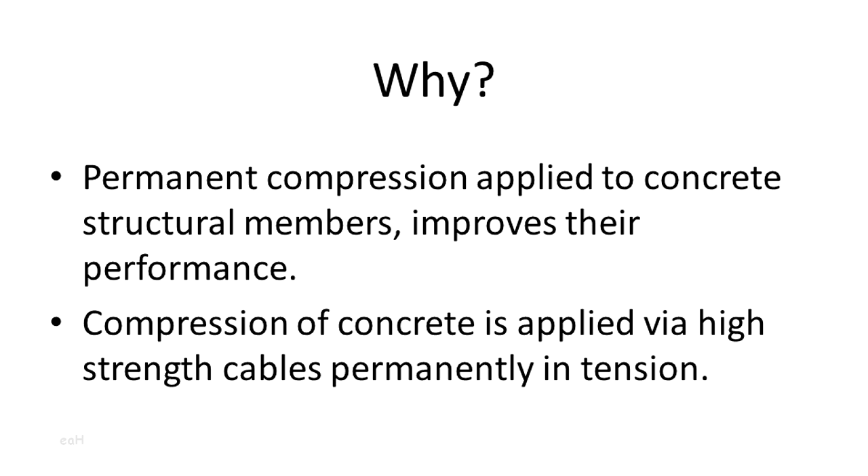Basically, what it allows the concrete to do is perform more efficiently. Concrete's weak in tension and strong in compression, so the purpose of these cables within your slab is to keep the concrete theoretically permanently in compression. So when you load it in a beam, instead of creating tension, you relieve the compression that's already in there. It allows concrete to be longer spans and thinner members and generally nicer. So that's how that works.

This effect is accomplished in various ways. You can have prestressed members, which are typically precast. These kinds of things are made in a yard somewhere, and the way those are put together is you have a cable that's stressed, and then you pour concrete into the form, and then when the concrete gets strong enough, you release the cable, and it's bonded the whole length.

I'm not going to talk about this kind of thing because the repairs are relatively simpler.

Post-tension members are kind of the opposite. You put the concrete first with ducts and cables in there. Then when the concrete gets strong enough, you can stress the cables, which transfers the compression to the concrete. These fall into two categories, bonded or unbonded. I'm going to be talking about unbonded systems because they're way more common and also harder to repair, I guess.

Could you define bonded? Sure.

Bonded basically refers to the concrete in general being adhered to the steel. So in that kind of system, if you have a cable that rusts through or something, the effect's pretty local. You lose your cable where it's rusting, and then the bond to the concrete makes it effective away from that area. In unbonded systems, you'll have this tendon running multiple spans in your structure, and it's not attached to the concrete. So if it breaks anywhere along its length, you lose the effect for the whole span. So it's a little more of a significant thing when those types break.

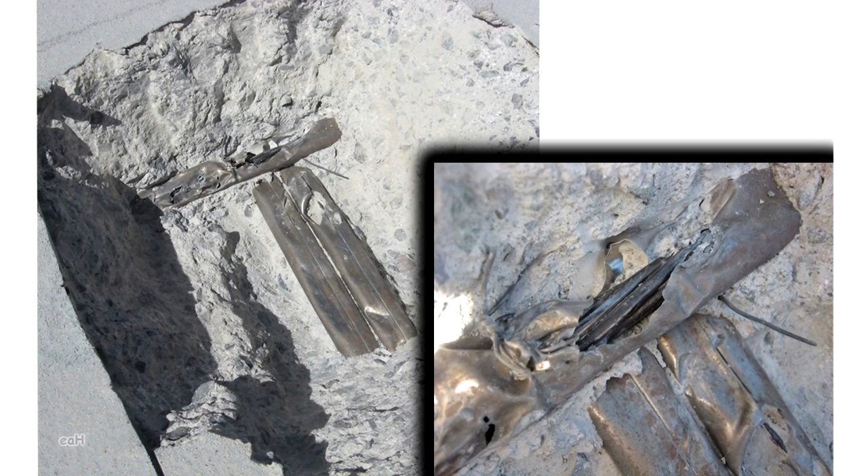So this is a picture of what a bonded post-tension system looks like. They have these metal ducts in your slab. What this picture is, is a parking deck. You're looking at the top surface of the deck where they dug out some of these. And then if you breach the metal duct, there's a cable inside, and the space between the cable and the duct is grouted with the cementitious stuff.

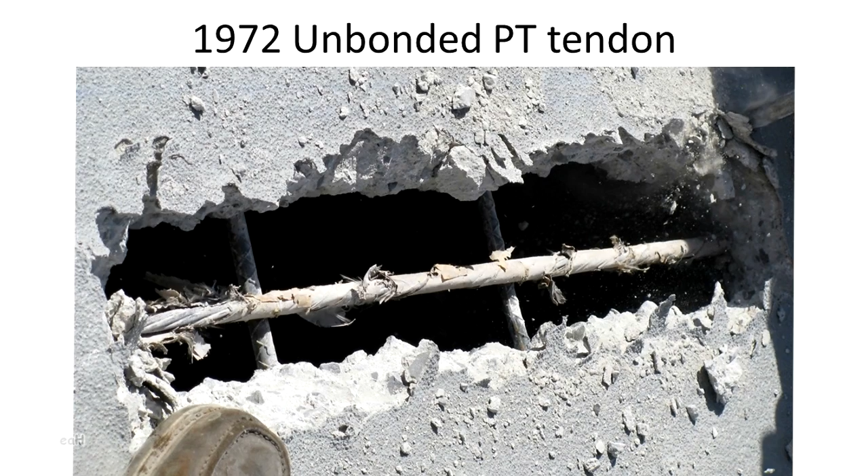Unbonded systems, basically it's a sheath with something to prevent the bond, like a grease or something like that, and then your metal cable goes inside that. This particular one is from 1972, and you can see it's got this ratty paper stuff on it, and you can't really tell if there was grease or not to begin with. I have an example of that here. This is kind of how it was done in the earlier days.

And kind of an intermediate system, I only have a little piece of it, but is this gray sheath. If you look at it closely, there's a lap in it. So it's formed by a plastic sheet that's lapped over and welded on itself. So that's kind of halfway between the old and the new. But once in a while we'll see those too.

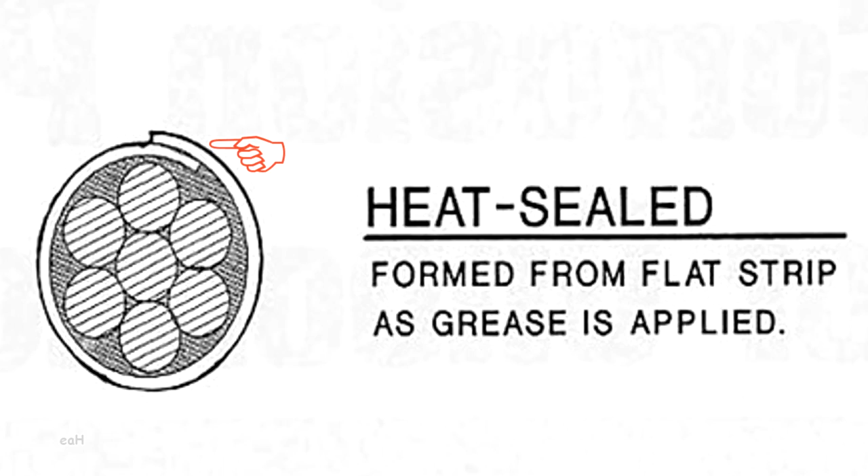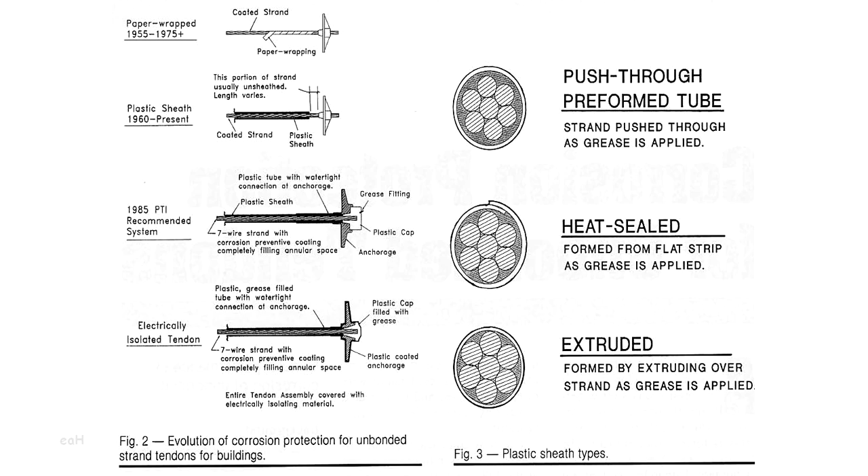And it's important because the strength of these cables is a lot stronger than your conventional steel. And if you lose a little bit of it, it's more significant compared to if you lose a little piece of your rebar. So this is the paper one, and then they went to plastic sheaths with gaps between the anchorages, which would corrode. And then in 1985, the Post-Tensioning Institute recommended this system, which is completely electrically sealed, which is what's preferred today.

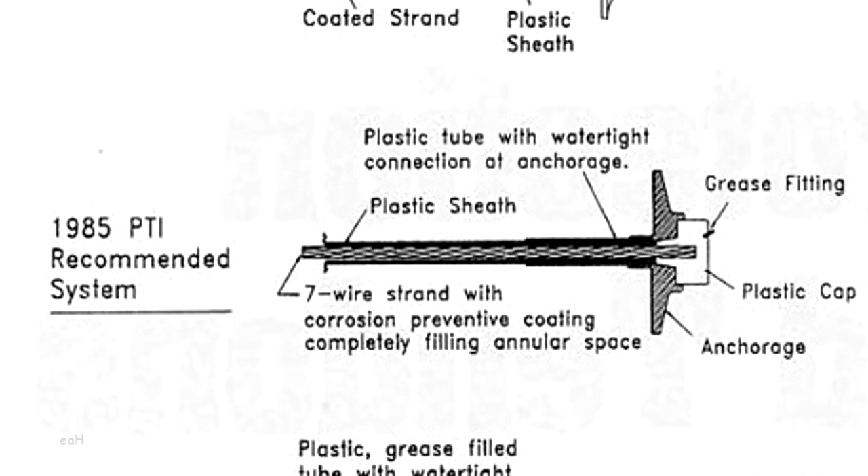And yeah, the electrically isolated basically means all the metal that's structural in there has no electrical connection to anything else. So the whole system is insulated.

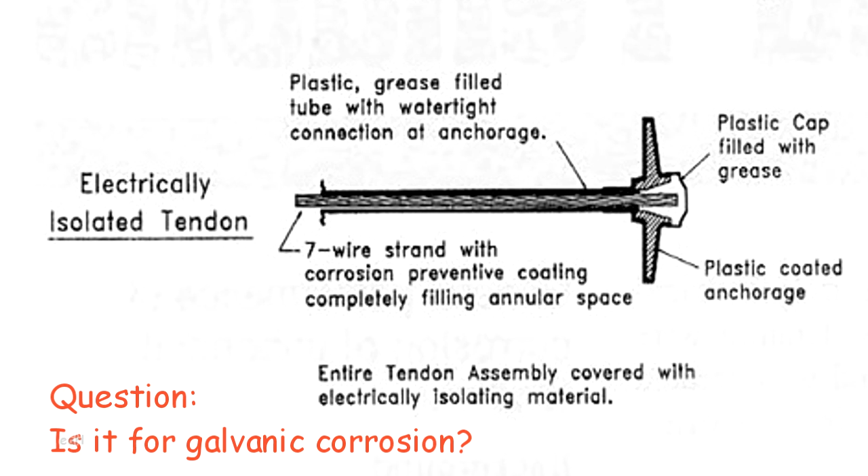Not necessarily galvanic, but just corrosion in general. A lot of the time, what happens is this zone is problematic because you put these cables in before they're stressed, and you have these anchorages with some sheathing. When you pull the cable, it stretches like 6 or 10 inches, so you need space for movement there. The electrically isolated system protects that area too.

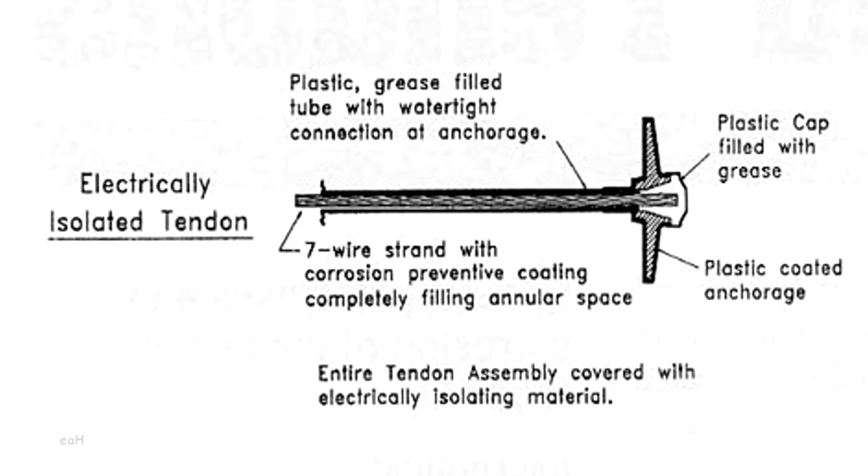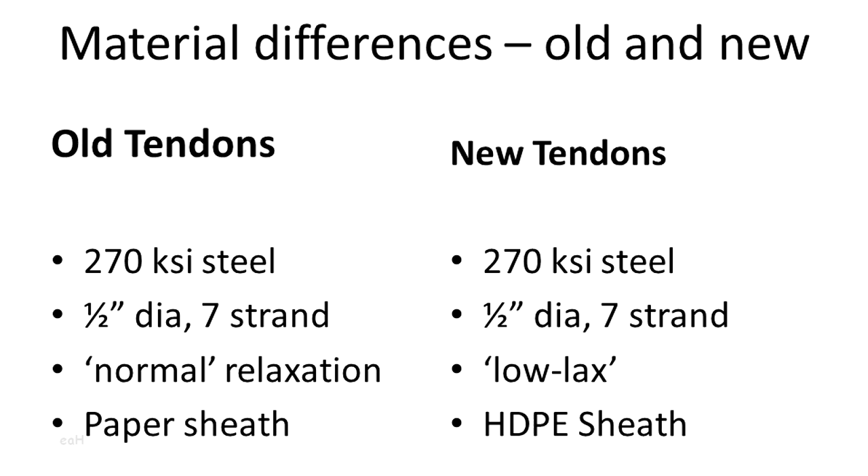The material in the cable, back in the 70s, has the same ultimate strength, 270, as the new one, and the same size and dimensions. The old ones are called normal relaxation, and the new ones are low relaxation. Relaxation refers to the metal stretching under sustained stress, so after a few years the state of stress in your metal will be less. The old sheathing is paper and the new ones are polyethylene. To give some numbers to the relaxation concept: the normal ones at 80% of ultimate stress will lose about 12% of their stress, while the newer ones lose about 4.5%. So it's a material improvement that's been made since then.

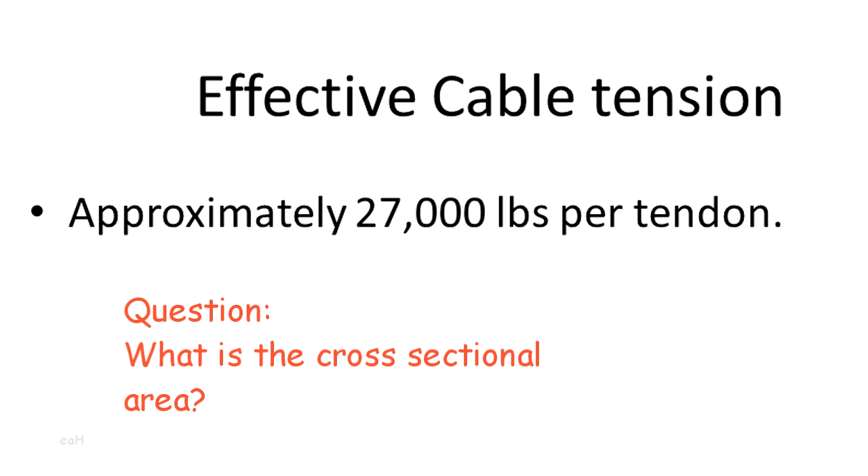The effective tension on one of these things is about 27,000 pounds, which is why when somebody drills through it, it makes a nice pop, and when they break they can blow out the inside of your building or through slabs. The cross-sectional area for 27,000 pounds - these are half-inch diameter, but not a perfect circle since there are 7 little wires, so it's about a third of an inch in that metal. That's about 70 to 80,000 psi.

So the basic problem with these things is corrosion. Highly stressed metal is more sensitive. Detailing in the old systems doesn't really take into account corrosion enough, and sometimes you get placement issues with the tendon going too close to the surface and being exposed too much. Then there's the man-made damage.

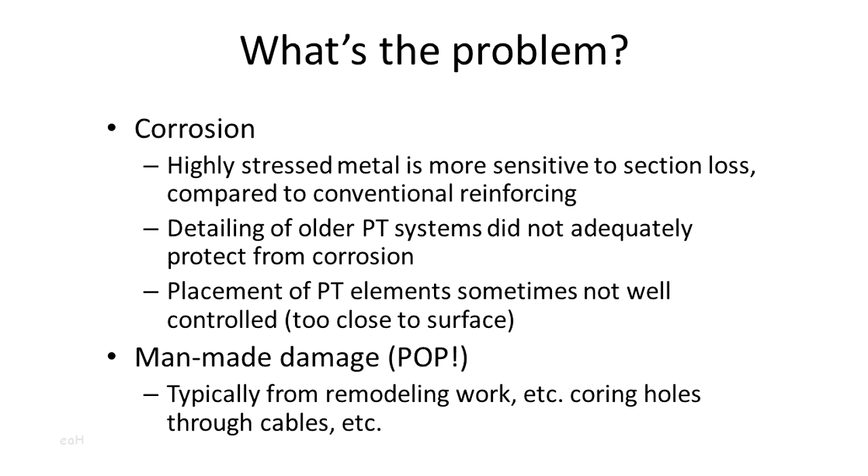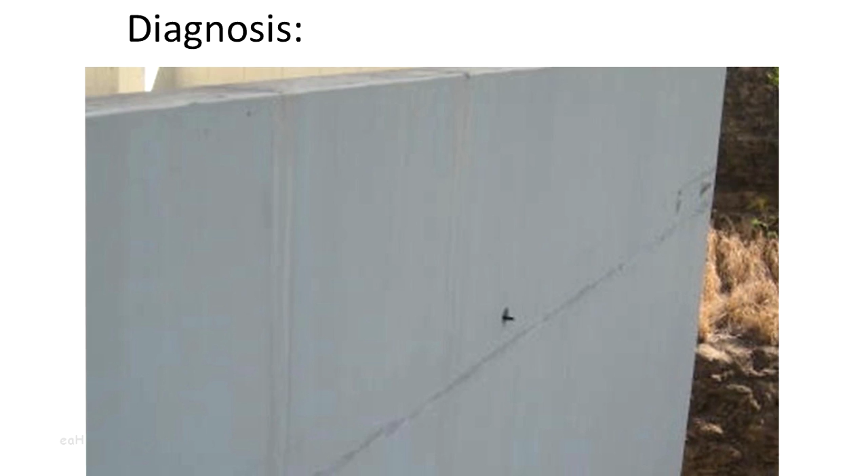I'm going to talk a little about what you'll see when there's a problem with one of these things. This one is the side of a building, where there's a little pocket with a stub sticking out. This one's only a couple inches, but these things can jump out a few feet in certain cases, depending on how long the cable is and how straight it is. It's basically recoil - if you cut the thing, there's all this energy stored in it, like a rubber band, and it tries to pop backwards.

So this was a broken one. I think these two ended up also having issues. This building is in Aiea - I think it's Century West, a residential building. These were about, I'm thinking, between 2 and 3 feet apart in spacing.

There were cables that aren't shown there. As I'd mention before the meeting, these systems are pretty redundant, so if one breaks, you've got one here and one there. It's not like your building is in grave danger. If you catch these through maintenance and fix the problems causing the corrosion, it's generally not a big problem as far as collapses and things like that go.

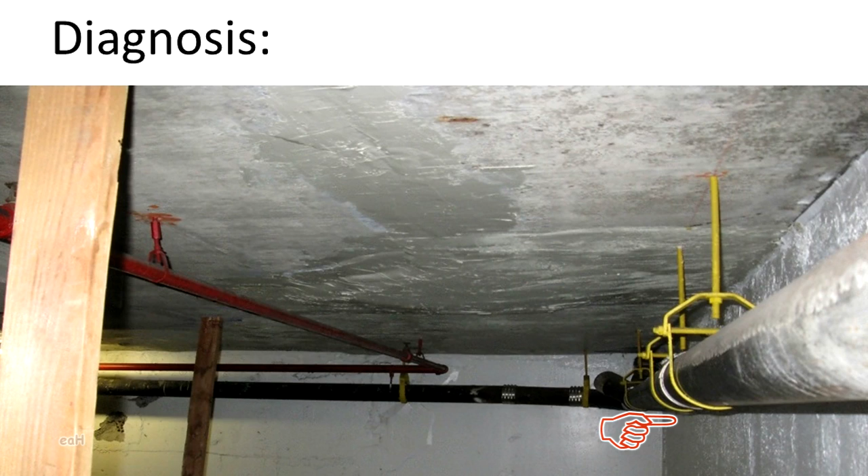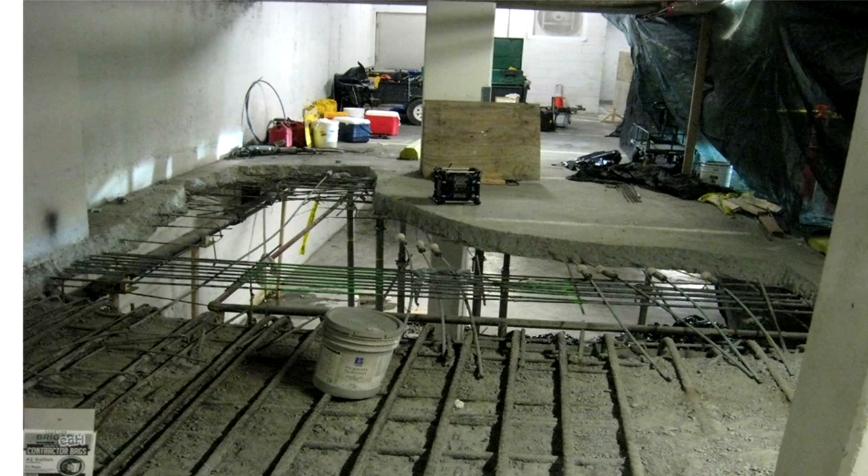This one is a parking garage in Waikiki. This is a PT slab, and there's this bulge in the bottom which was slathered with epoxy by their maintenance. We found the cause of this was this wall - it's below the water table, so you get seawater seeping in, which caused lots of corrosion. This is the top side of that slab after we took out everything needed for the repairs, and they had a bunch of broken ones here - you can see 3 there, 4 there, and a couple more broken ones going this way. So a little thing like that, which doesn't look totally alarming, can turn into something bigger if you have a big driver of corrosion in the area.

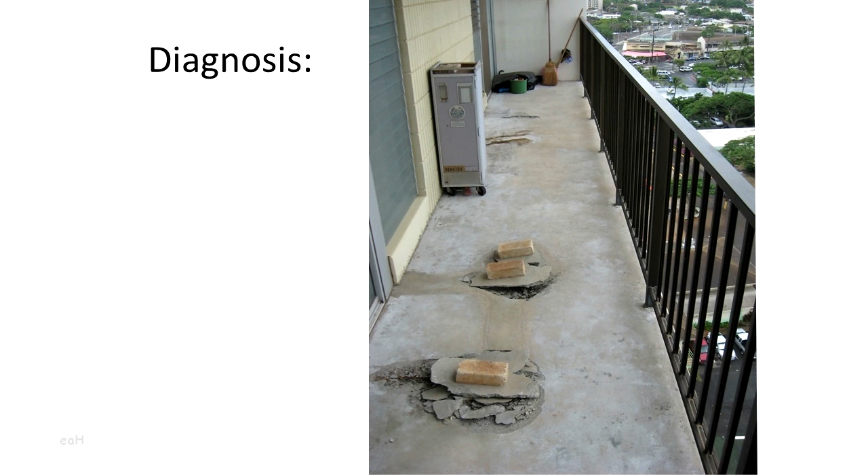This is a lanai near University. These pieces popped up and they called us to figure out what's going on. The building had paper-wrapped tendons, and right here is the high point because the lanais are cantilevering over the edge, so you want your reinforcement as high as possible. They were covered by only about half an inch to zero inches of concrete, and you can see it's just bare concrete - they didn't have any protection at all.

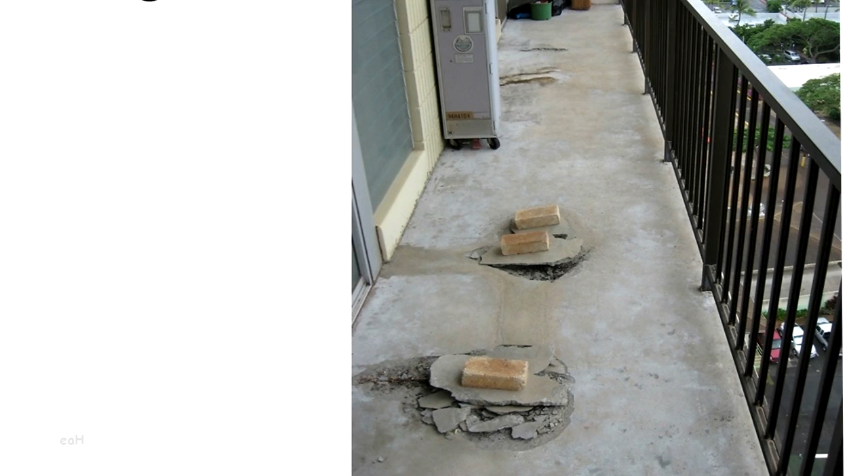Why do they pop up like that? When you release the tension, the thing recoils back. So if you're at a deviation in profile, or what also can pop these up is simple rust expanding. It's like a kick of a rifle butt.

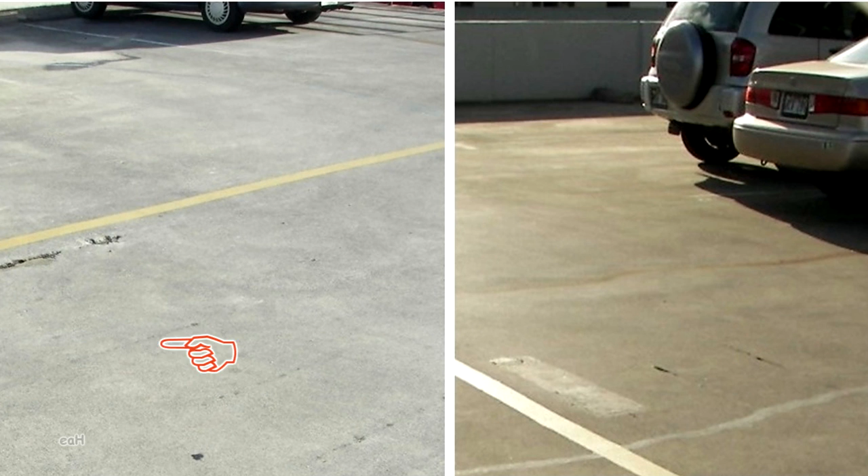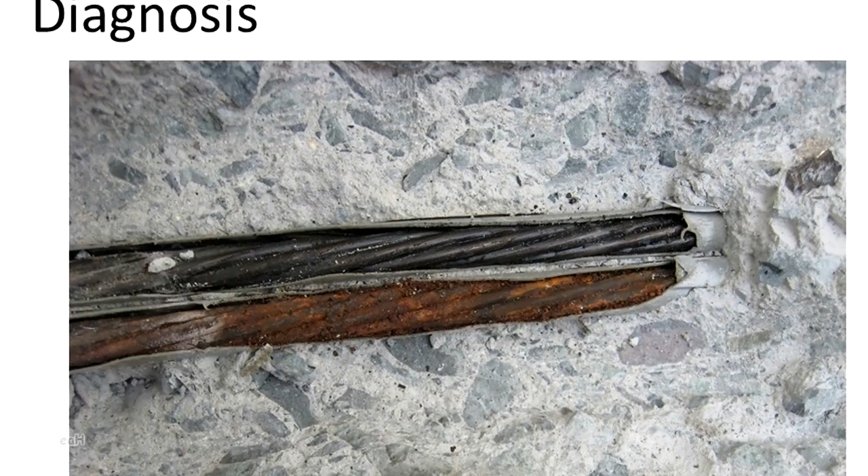Yeah, basically. So sometimes you'll see little spalls on your decks like this, and that can mean post-tensioning issues. This is an opening in a slab we did, and we cut off the sheathing to see what the cable looks like. This one's bright and shiny, and this one's got some rust on it. The contrast doesn't let you see that too much. Basically what happens is once water gets into these plastic sheaths, they're captured there, and they'll find the low points and puddle, causing problems. But if you have it sealed off, it stays good.

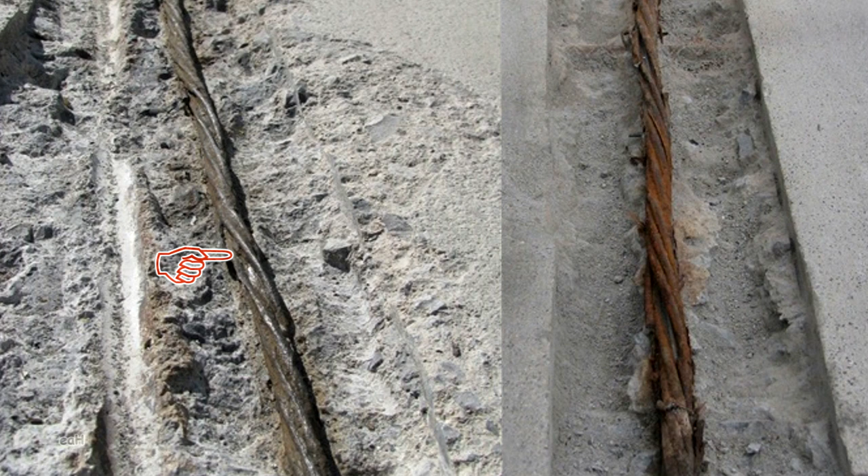So I'm going to go through a couple that are good candidates for repair. This one you can see has a wire kind of missing, so it's at least partially lost its stress. This one's kind of the same deal. Sometimes when you take them up, there's no attachment at all. This one has some emulsified grease in it. The old greases they used weren't durable—they'd get dry and crumbly after a while.

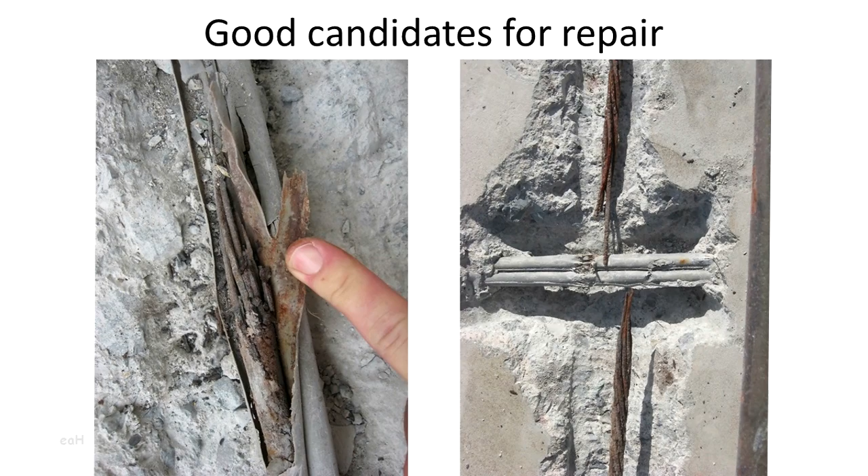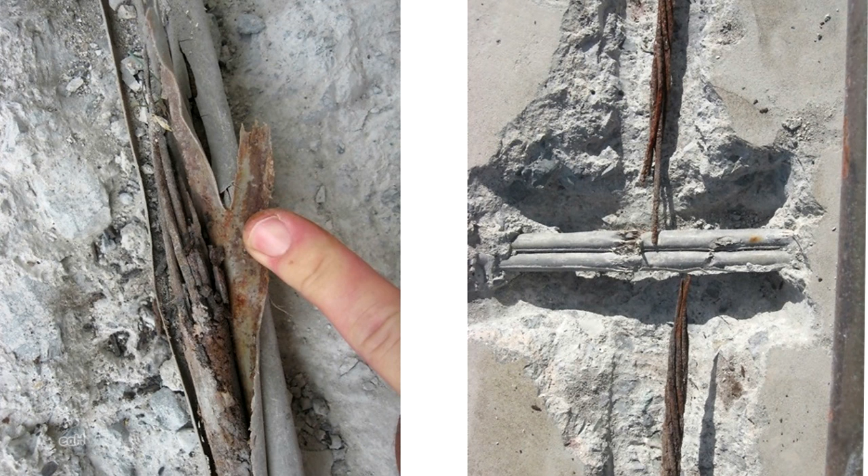As you go along, could you mention if you were redesigning this today, what would you do to prevent this? Sure. For one, this one was fairly close to the surface, so you'd want to have it covered a little more. This system is that intermediate system with the lap sheath. The new systems have a continuous plastic tube, so there's no path for water to get in. And the newer greases are improved also.

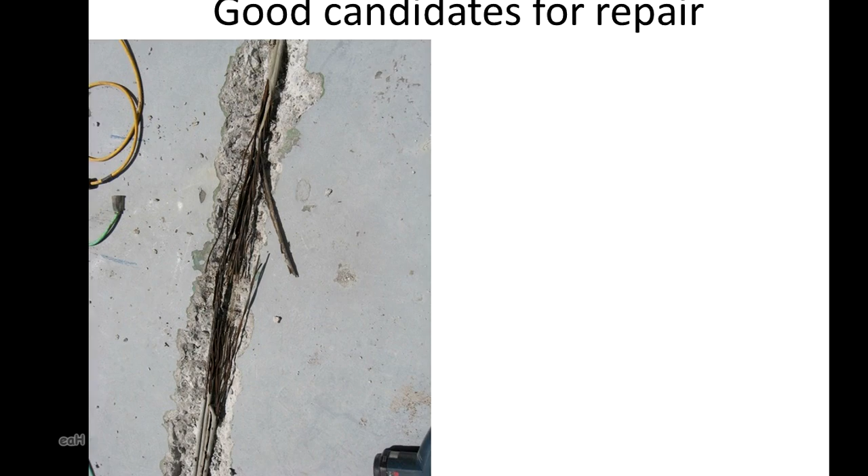This one, sometimes they get big and basketing out, because once you start losing them, the wires get frayed. Did the concrete just explode on its own, or was that dug out? It was almost there—you had little chunks on top.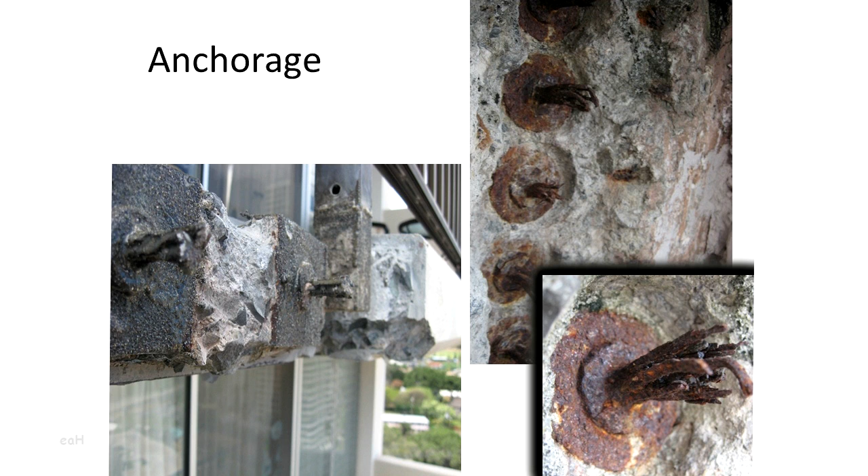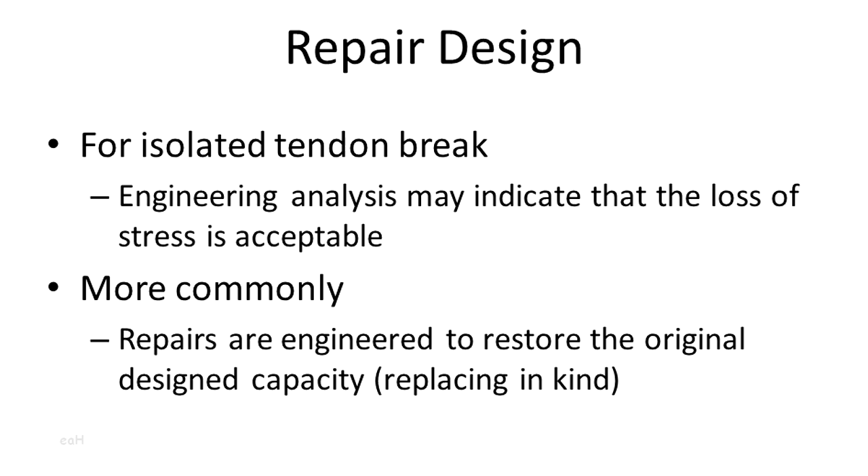For an isolated break, you may be able to accept the loss of a tendon. More commonly, you just restore what the original designer put in, because the cost of engineering fees approaches the cost of actually doing the repairs, so you might as well just fix it. The procedure: you remove the cables, demolish the area near the break to make a splice, insert a new cable, assemble splices with new sheathing, apply tension, install sleeves around your splices, and patch it up with new concrete. You also want to coat the outside of the concrete to prevent water coming in.

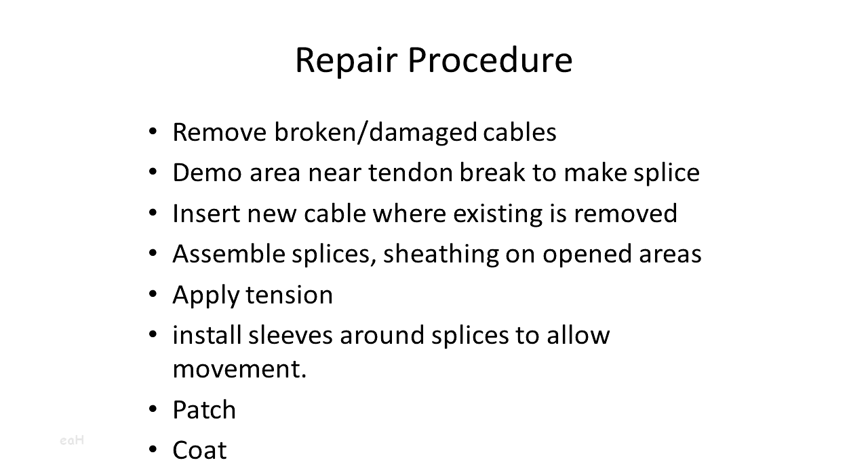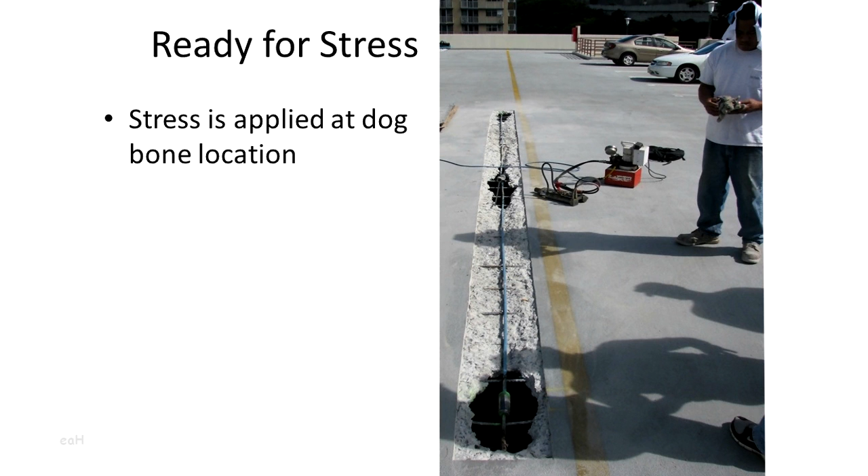What do you splice? I'll show you in a second. The splice is basically a barrel-shaped thing, kind of like the Chinese finger trap. There are wedges that grab the cable and prevent it from pulling out.

This little component is called a dog bone because it's sort of shaped like that. You have a cable that comes in this way, and it's anchored there. Then your cable coming from the other direction comes in this way, and it's also anchored here, but it allows you to jack against it. Because sometimes the ends of the cables are obstructed from facades or whatever, a lot of times it's easier to do this somewhere in the deck.

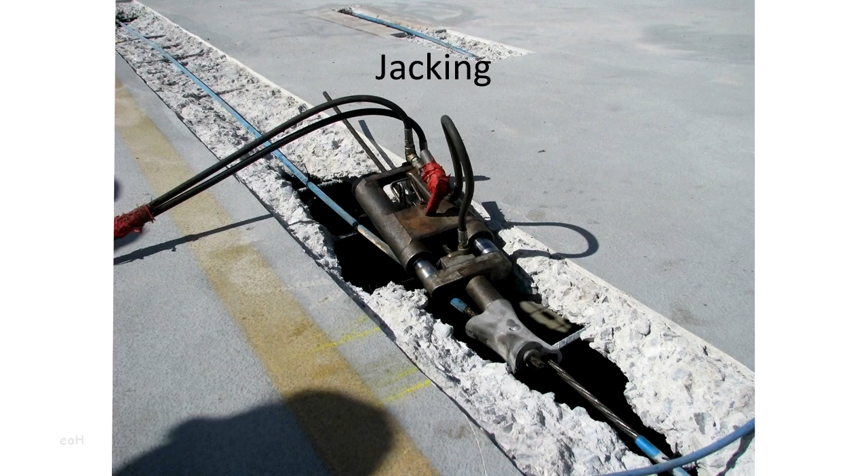So I'm going to show you some videos of what this looks like. The first thing they do is they set all the wedges, and then they apply a stress to it without finally locking it off. That's just to set all the components and make sure everything doesn't move unexpectedly.

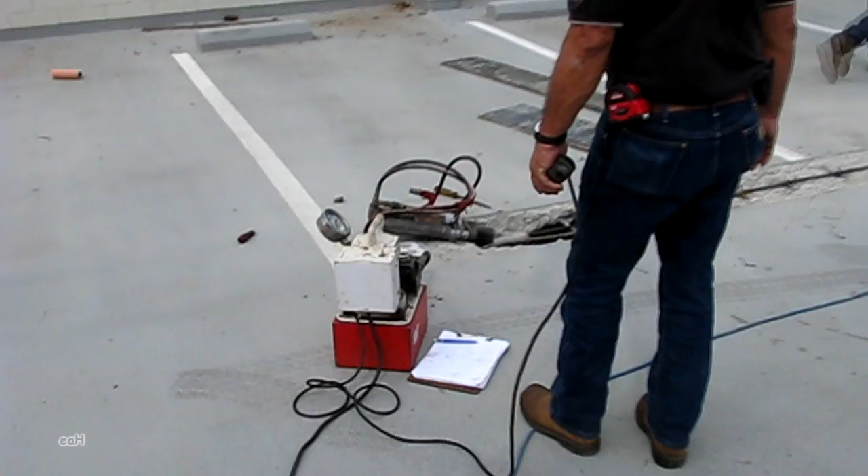This device here is a hydraulic jack. You've got a pump here with a gauge that measures your pressure. This little guy has a wedge that grabs the cable here, and it's pushing against that dog bone piece there. So in doing that, it pulls the cable through.

It's important to watch how much stress you're putting on it, because if you stress it too much, you'll break it, and if you don't stress it enough, you're not getting your effect. So that's what it looks like just to set it. And he's going to take that guy off.

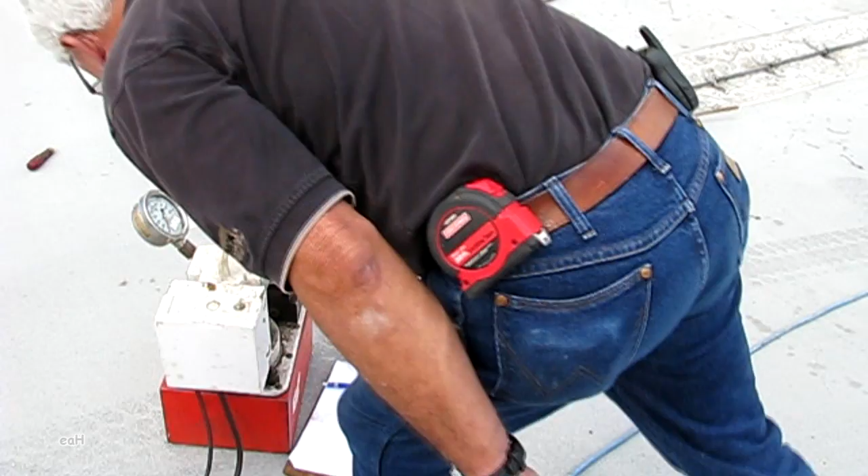The next step... You ever pop one of those cables when you put some tension on? Yeah, it happens. What happens in that case is you pull it, and a lot of the cable's still embedded, so it may have issues down the line somewhere.

So he'll do that, and it'll just keep pulling out. And if there's an issue somewhere down the line, what they do is they take the cable and pull it out of the hole and measure how long it is, and then they go dig where the issue is and splice it again. This can happen a few times.

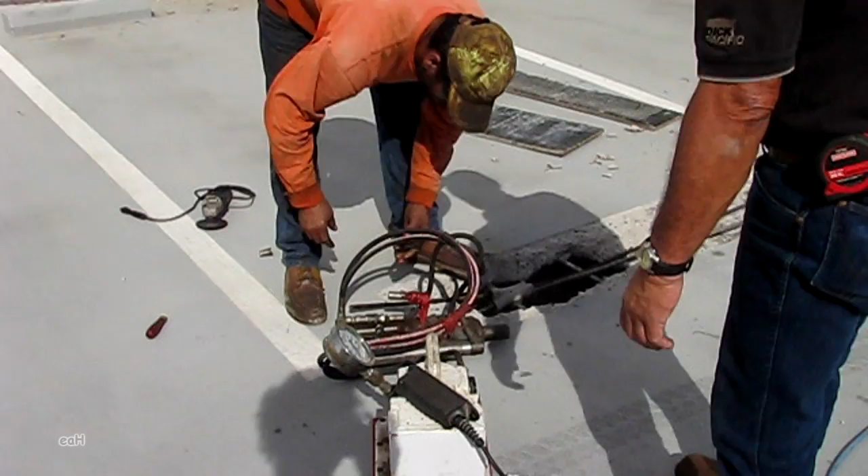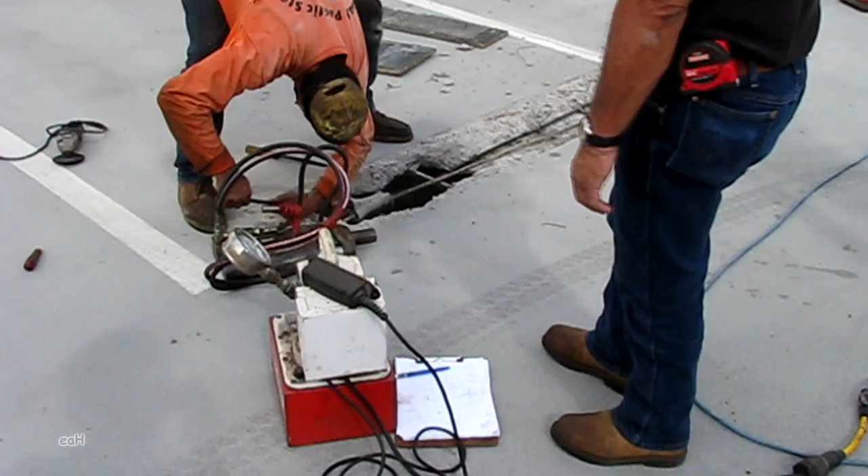So the next thing they do is install wedges on the cable. The wedges are little hardened steel things like this, you can pass them around. They've got teeth on the inside of them to grab the cable as it pulls in. So he's just sliding it on there, and the wedges seat inside of a little hole inside the dog bone piece there.

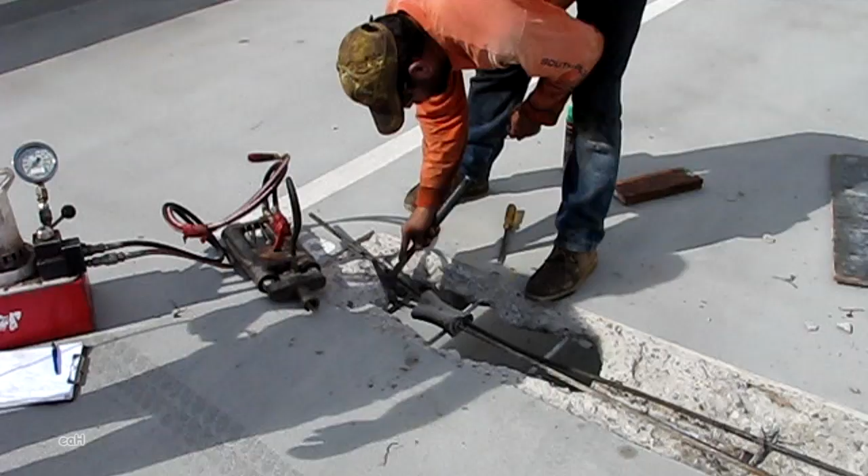Then the next thing to do is set up your hydraulic ram to the final test. He's making sure he's got a connection there to the cable. Just 2,000 gauge reading, I forget whatever that is there, but that's just to seat the couplers, the wedges.

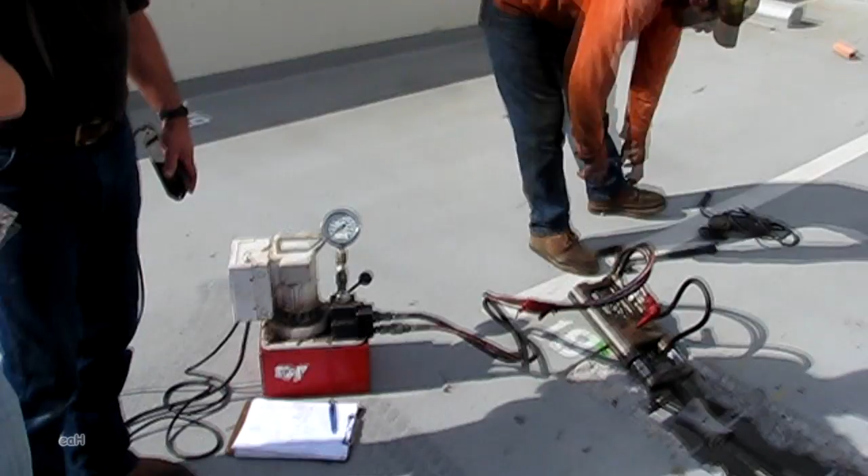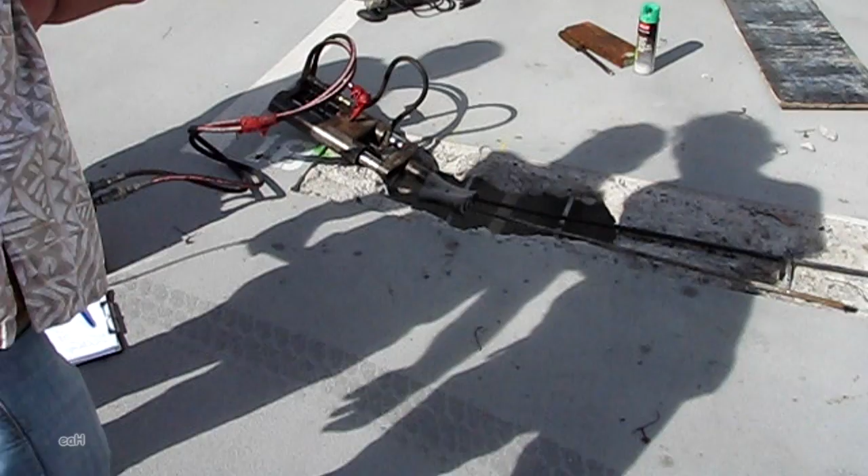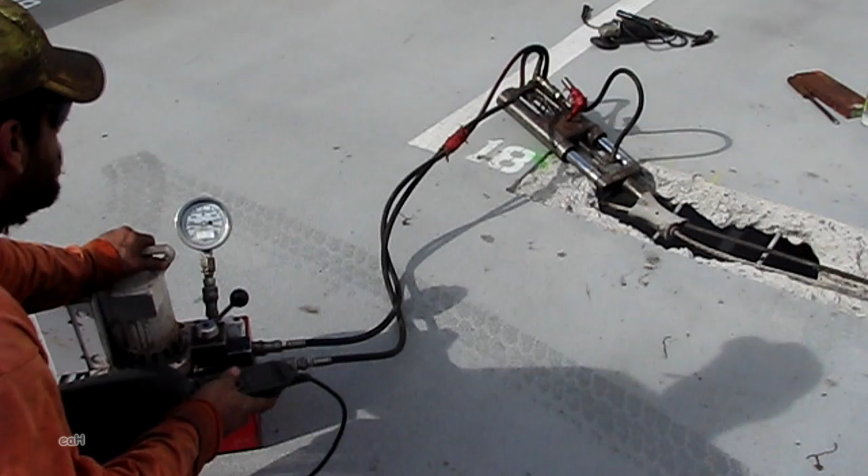For this particular cable, it was kind of a long run, so what he has to do is jack only goes a certain distance. So he pulls it and then resets it and then pulls it again to get the final amount there. Just resetting the lock on the jack side.

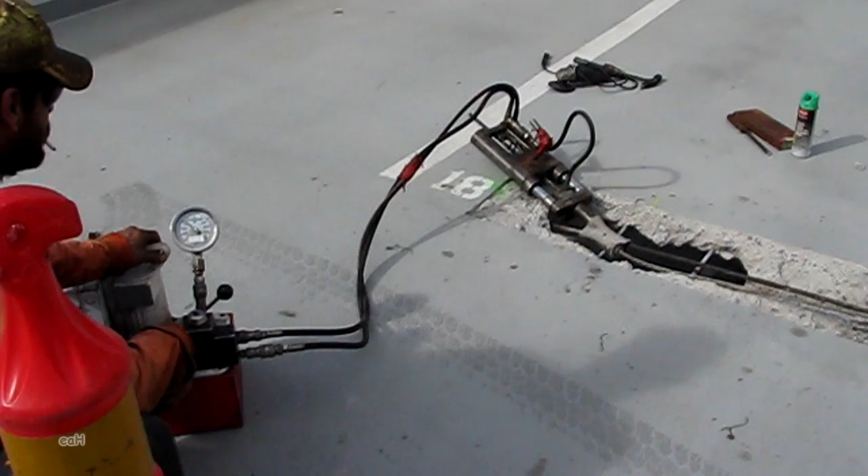These cables can stretch quite a bit, and it's important to take note of how much they stretch when you're doing this, because if you expect it to stretch 10 inches and you only get 5 inches of stretching, and you have the load you expect, something's going on there, and basically it means you're snagged on something. Or if you get too much elongation, it means something's slipping, and you have to kind of diagnose that. The gauge is in PSI, which converts fluid pressure to the unit conversion, converted to stress.

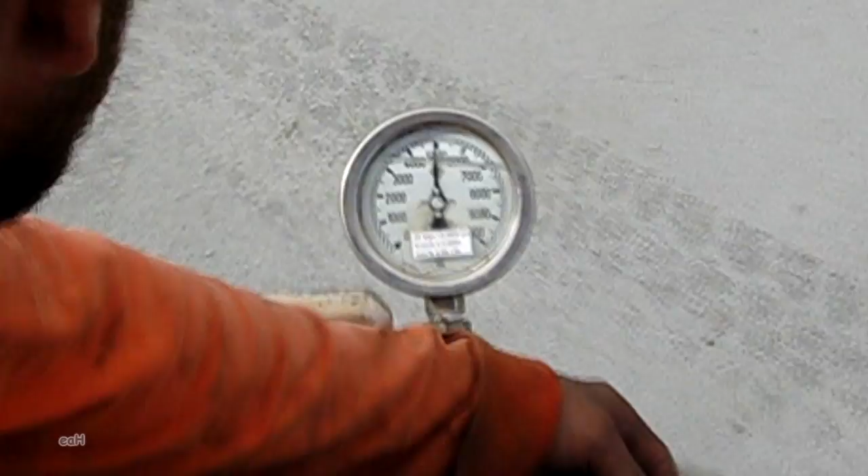The next step is measuring the elongation, like I told you. The way that's done is, before he does his tensioning, he makes a mark on there, and then afterwards he measures the change in placement for that mark.

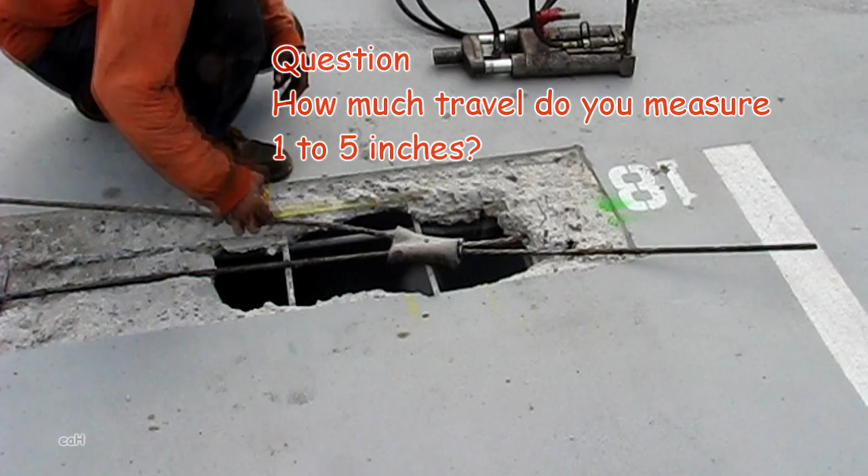So, how much travel do you measure? It depends on the cable length. Anywhere from 1 to 5 inches, could be quite a bit more than that. Usually a 60-foot cable is about 3 inches or so, so it can be twice that or more easily.

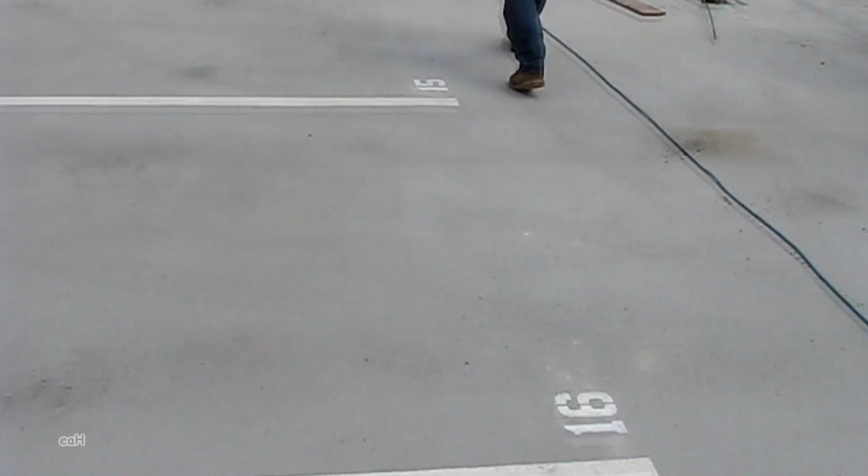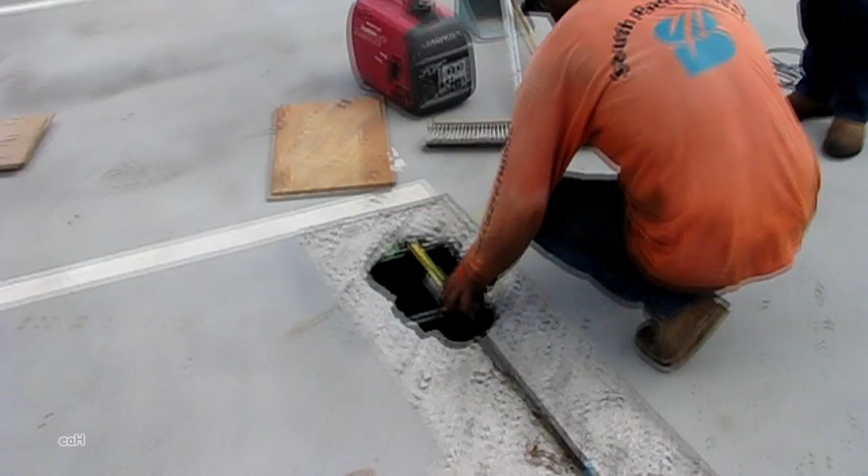It's part of the procedure for doing this sometimes is you take the old cable out, you measure where it is to find the location of the break, then you have to put a new cable in. And the way that it's done is you have to push the new cable through the old hole.

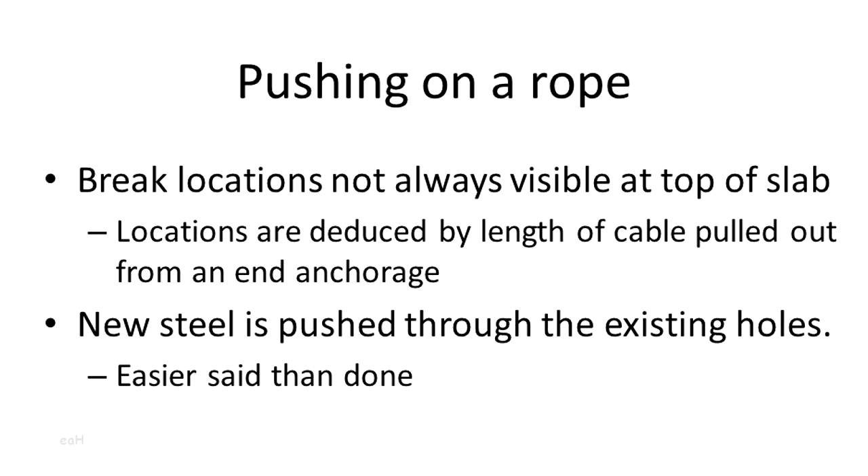For this one, it's a little lesson in buckling. This cable kind of deviates that way. I'll show you what was going on in this picture.

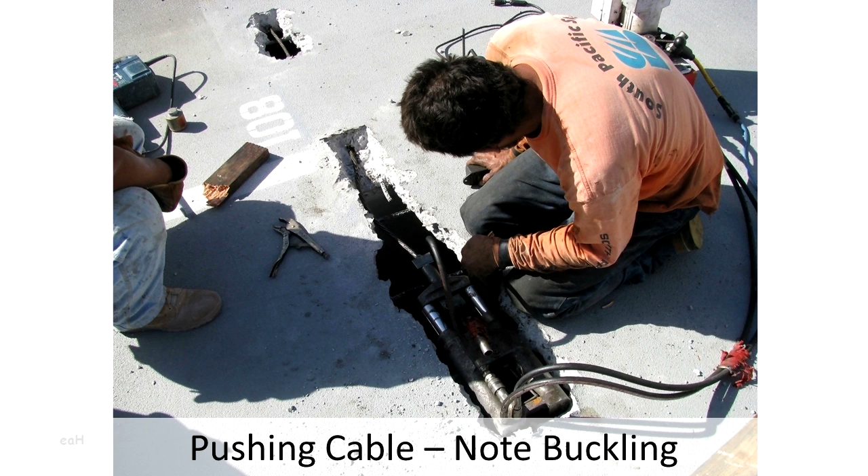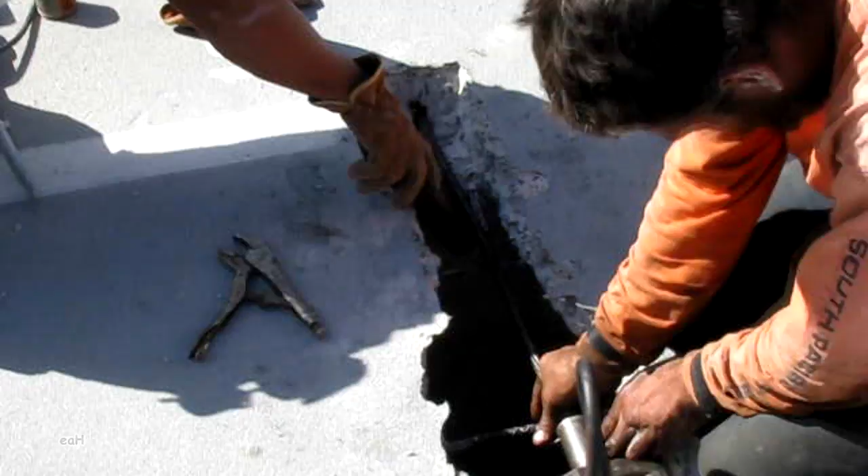So this takes a while because if you have to push through like 30 feet of cable and you only have a jack that travels 6 inches at a time, you can be sitting there stringing it through for quite a while.

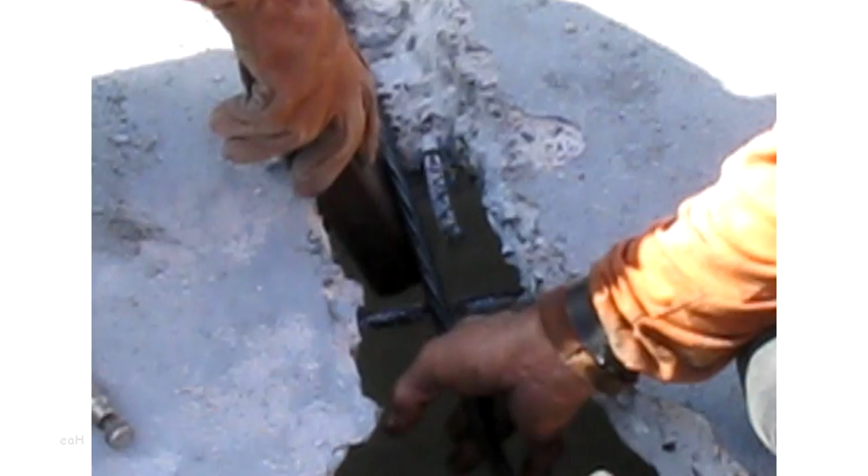He's getting his jack set up so it can react against something. This cable's getting pushed from here to the hole there. I don't know if our resolution is going to let us see it though. He's pushing on it. The buckling length's too long, so the column buckles. So it can buckle either way. So if you brace against the other side, it buckles that way.

The solution in this particular situation was to decrease the buckling length. So he put a piece of wood in the hole, parked his truck on it, and then this length got shorter. So yeah, these guys, you never know what you're going to find, and they have to be smart and willing to adjust their plan with whatever comes up. Because a lot of times you pull on a cable and it's broken in 3 other places and stuff like that.

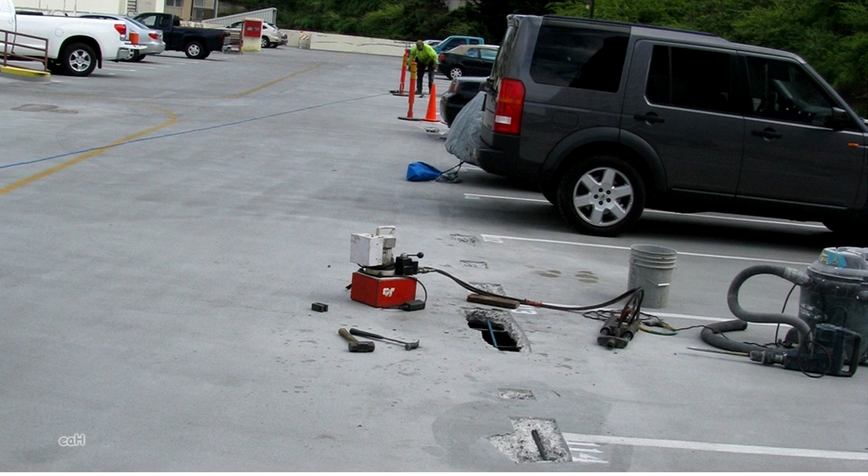So this is an example of that. I think the first break splice was here, and then they had to go here, here, here, there to kind of chase it down. So sometimes you apply tension from the outside of the building, which is using an anchorage like this. I'll show you what that looks like.

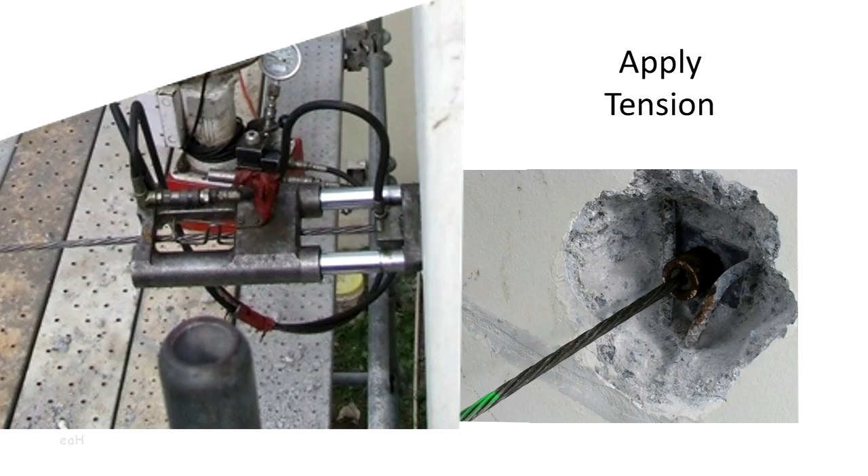Kind of the same deal as before. Might be a clearer view of it. This little wire piece here holds a wedge that's held in there by springs, and that's where the jack holds it, and then there's another wedge in there.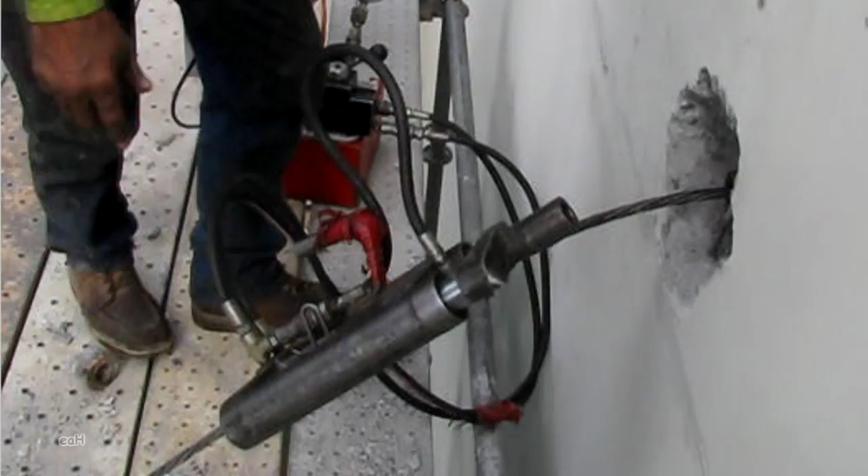He's resetting the jack. This jack has limited travel, and these cables are expected to elongate longer than the travel of the jack. So he has to jack it, lock it off, and then reset his jack, and then pull it again to get the.

Yeah, that was normal. There we go. And it hung on because it has this jack on this wedge on this side.

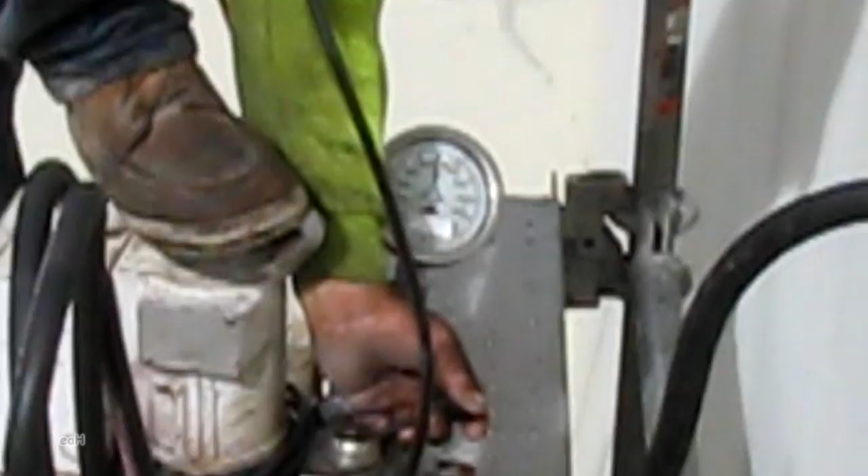And they don't have to do anything special to lock the wedges off. Just the stretch of the cable will pull those 2 wedges into the seat, and they automatically lock. When the jack moves out like that, everything's working. Yep, exactly.

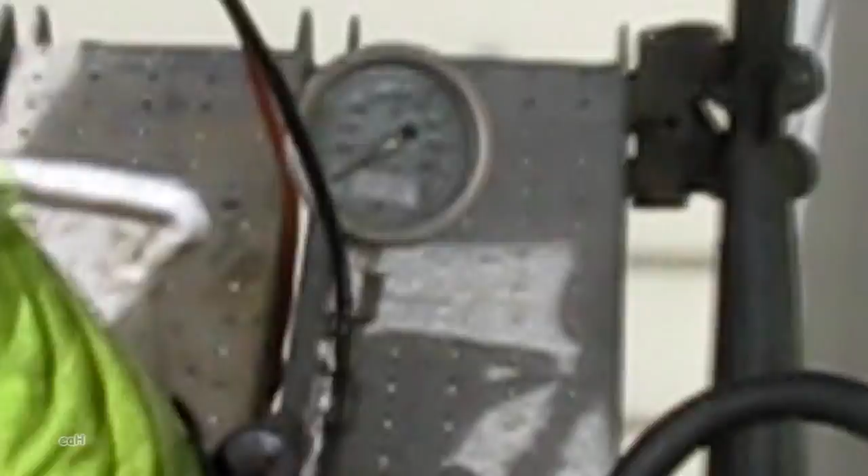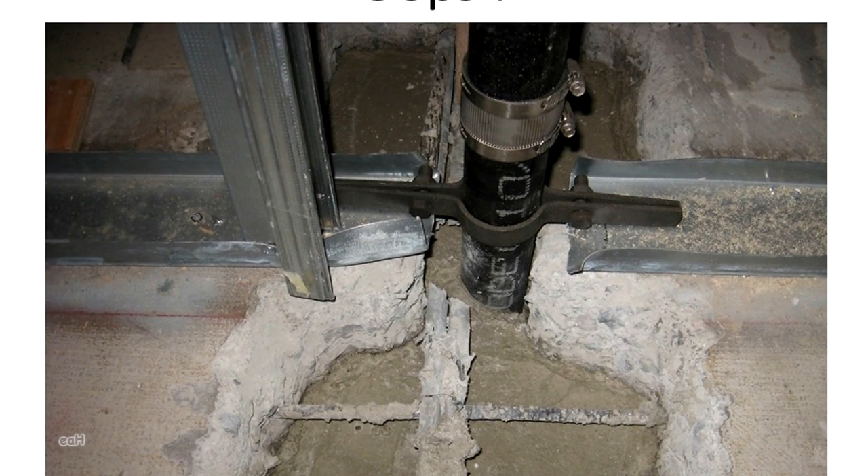Check before you dig, I guess, is the lesson here.

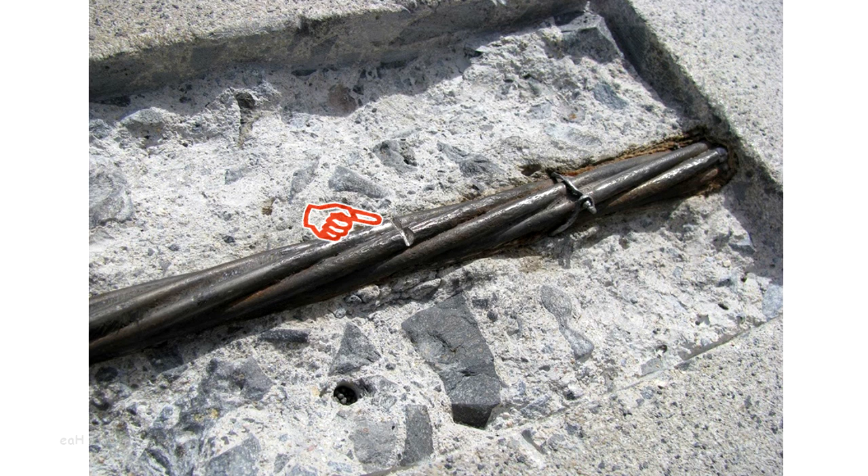Yeah, a lot of times when we scan slabs for people, we'll just mark right on the slab so there's no question. Also, when you're doing these repairs, if you don't have experienced people that know what they're doing, when they're preparing the area, see how they nicked the two wires there? That was happening when they were saw cutting the edge of this square here. So yeah, you don't want to do that.

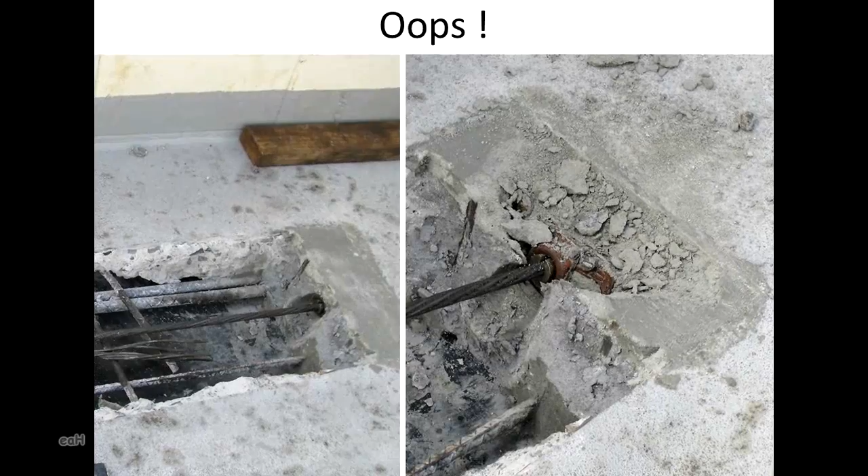This picture is when they were making a new anchorage for their cable, and they put this concrete in and then stressed it the next day, and that didn't work because the concrete didn't have time to attain its strength, so it just kind of crushes.

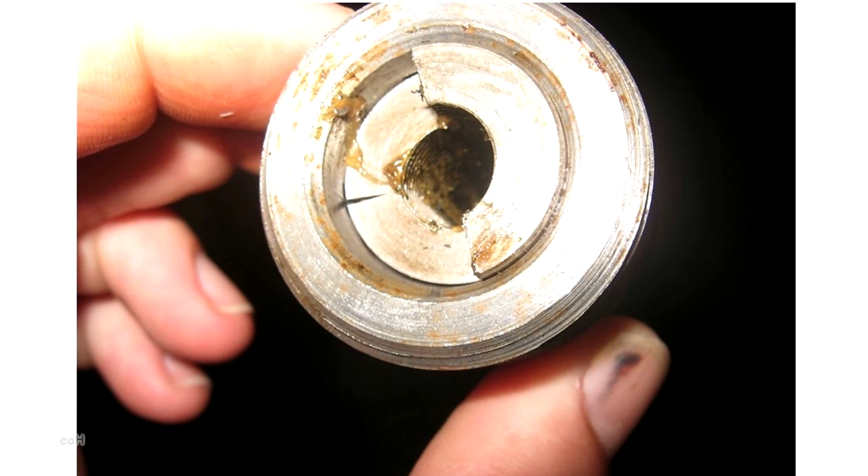This one was kind of exciting. The wedge had this crack in it, and it broke when they were stressing it. When these things break inside concrete, they have a bunch of recoil and they can throw pieces off. But when you have a length of 12 feet exposed with nothing restraining it, that cable whips out and smashes into things, and people can get hurt doing this. So that's my experience with that. Nobody got any injuries that day, but it was pretty hair-raising.

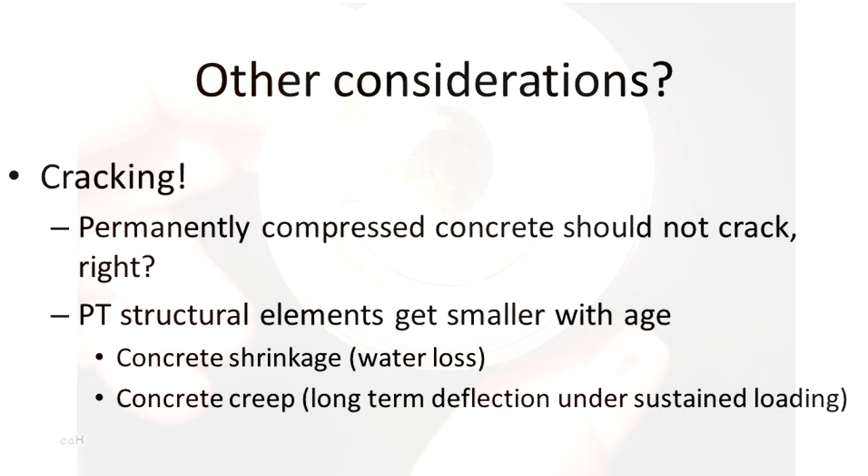Other considerations with PT structures: if you have permanently compressed concrete, you don't expect it to crack, right? However, post-tension concrete gets smaller with age. It dries out. The constant compression of the concrete causes it to eventually change dimension and get smaller. These dimensional changes can get restrained by other structural elements. So if you have a PT slab supported by shear walls, the shear walls are going to be really stiff, and the slab's going to be trying to shrink. So you can get some cracking associated with that. Usually those aren't really structural concerns. Repairs for that kind of stuff is more architectural in nature, but it's good to know about, I guess.

What shrinking are you talking about in a 60-foot slab? Off the top of my head, I probably couldn't tell you, but it's not a huge amount. It's probably less than an inch.

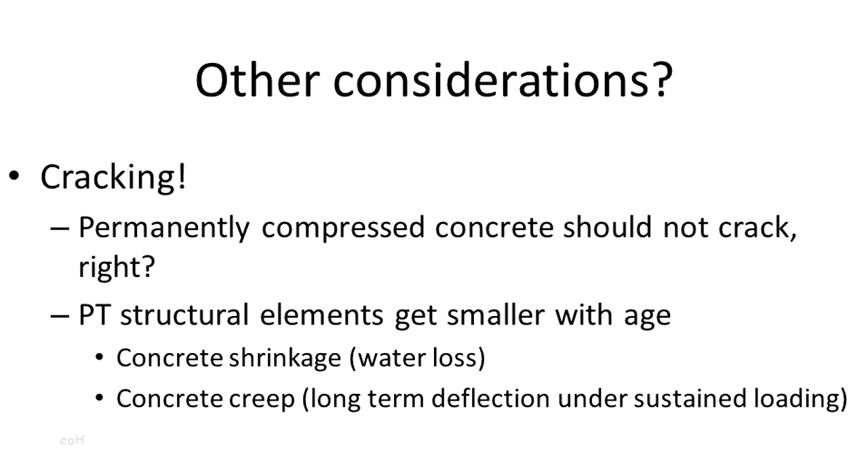What's this little wedge thing made of? Yeah, it's steel, super high strength stuff. They're heat treated, so they're real brittle and hard. I think they're probably even stronger than the PT strands.

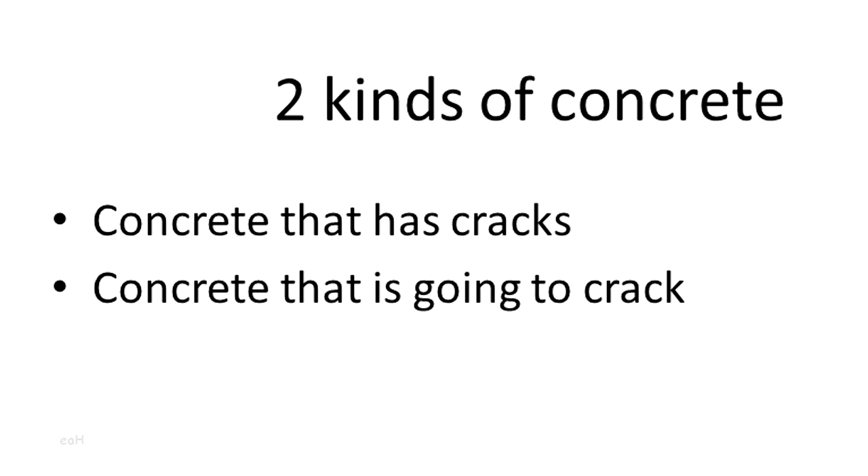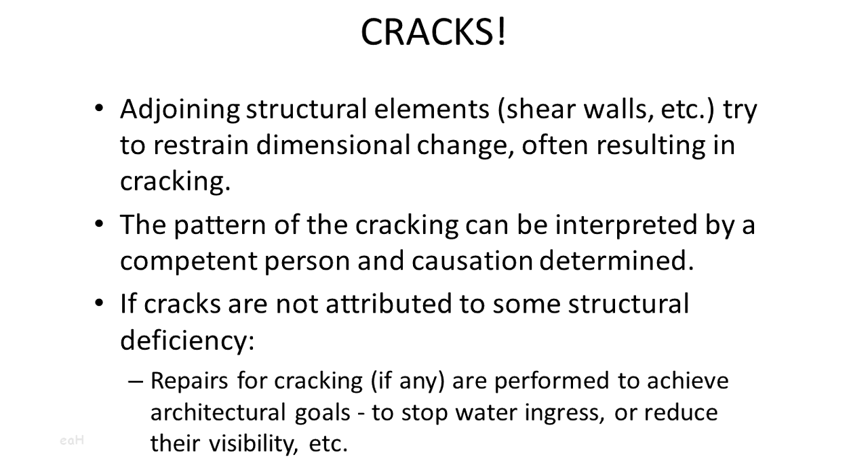One piece of advice from the senior guys in our company: you got two kinds of concrete, concrete that has cracks and concrete that's going to crack. So that's our thought on cracks. I kind of talked about the adjoining parts of the structure. If you have a PT structure with cracks in it, usually you can tell by where the cracks are and how they're oriented with what's in there, what their cause is. Usually they're not attributed to structural deficiency.

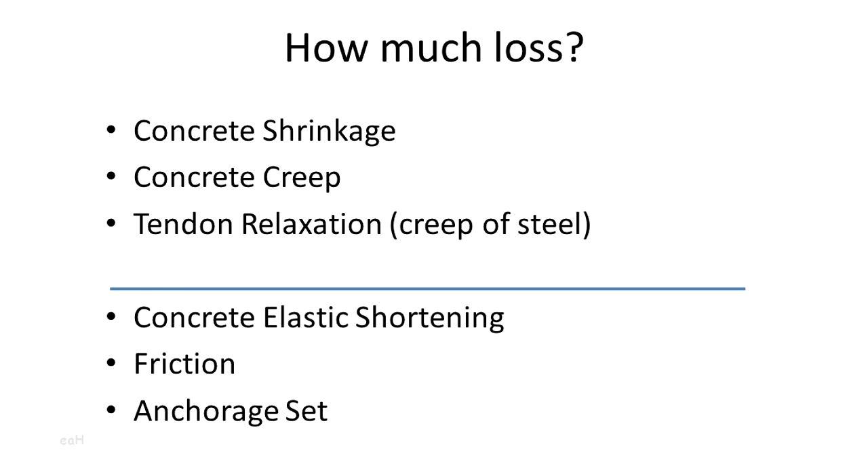Anybody curious about anything I said? Can you get stainless steel cable? I haven't seen stainless steel PT cable. I think there may be limitations on the strength, and relaxation kind of issues. I know when you have cable exposed in corrosive environments, you can get galvanized cables. So you'll see those for parking barriers and stuff like that. Neat idea. Okay, thank you guys.